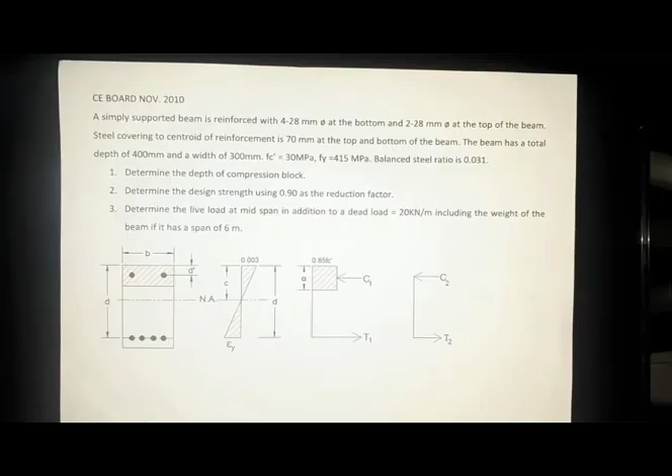Yung problem natin ay binigay noong November 2010 sa CE board exam. A simply supported beam is reinforced with 4-28mm bars at the bottom and 2-28mm bars at the top of the beam.

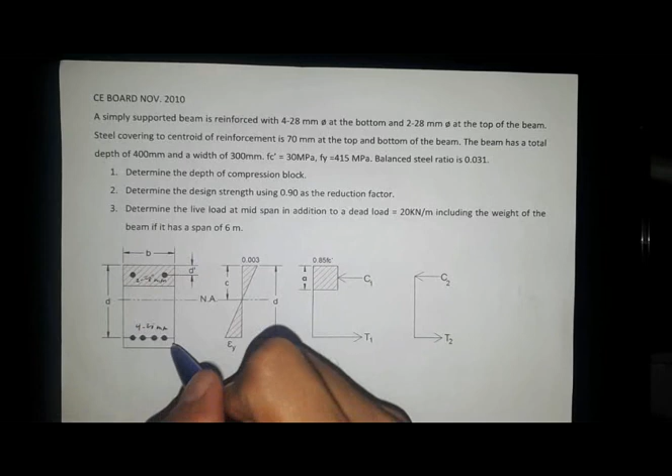Steel covering to centroid of reinforcement is 70mm at the top and the bottom of the beam. So 4-28mm yung bottom, while yung top natin ay 2-28mm. Steel covering to the centroid of reinforcement sa bottom is 70mm, while sa top, yung D prime ay 70mm.

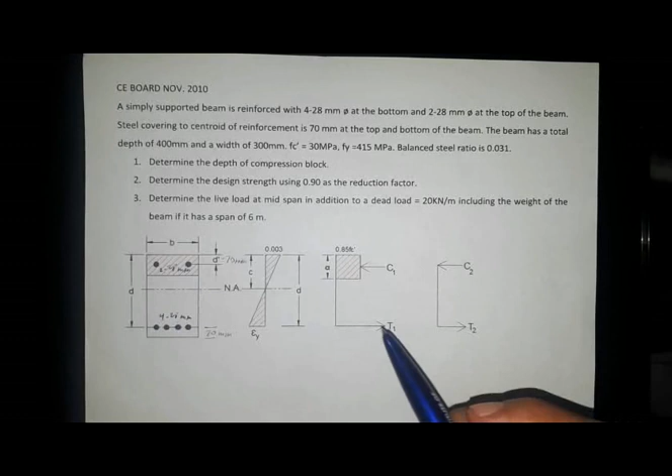The beam has a total depth of 400mm. So yung H or total depth ay 400. Kung i-subtract natin ang 70, ang effective depth natin ay 330mm. At ang width ay 300mm, so ito yung width natin, 300mm.

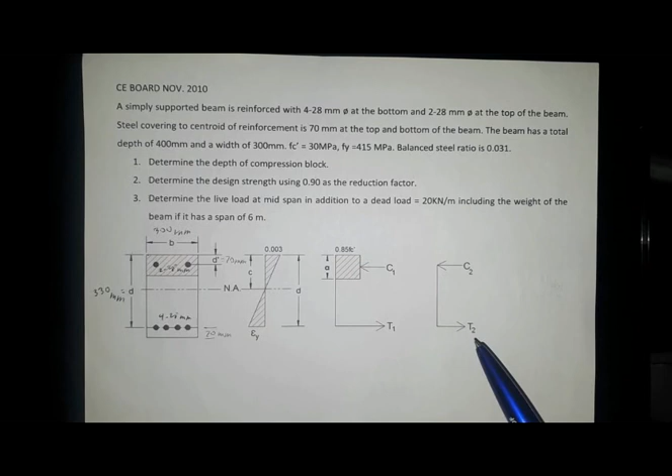FC prime equals 30 MPa, Fy is 415 MPa. Balance steel ratio is 0.031. I-verify natin ito kung ito pa ba, dahil ito ay binigay noong November 2010, malamang ginamit dito ay NSCP 2001 version. May nabago na sa 2015, kaya i-verify natin kung yan pa din yung lalabas.

Number 1, determine the depth of compression block. So we refer to the value of A.

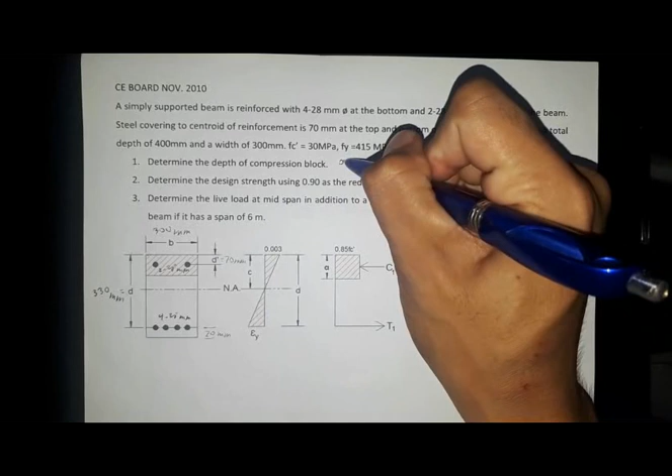Number 2, determine the design strength using 0.90 as the reduction factor, so MU. I-verify din natin kung 0.9 pa ba yung dapat gamitin, baka kasi hindi na yan based dun sa provisions ng code.

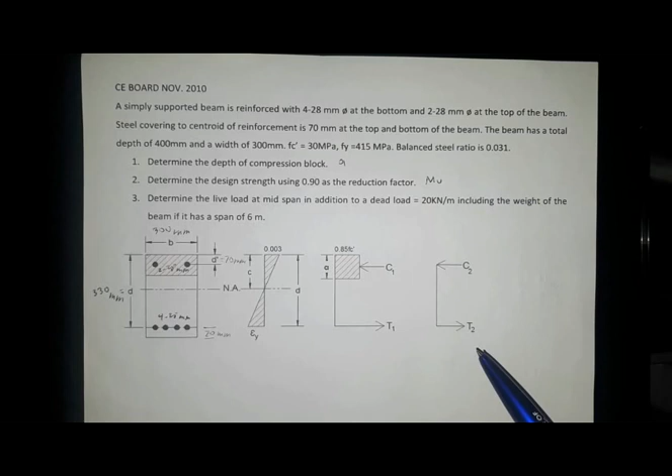Number 3, determine the live load at mid-span in addition to a dead load of 20 kN per meter, including the weight of the beam if it has a span of 6 meters. So sa number 3, we are looking for the value of the concentrated live load LL for the beam.

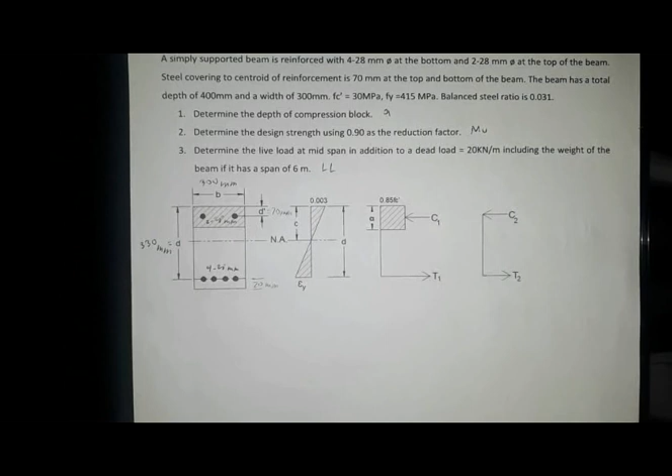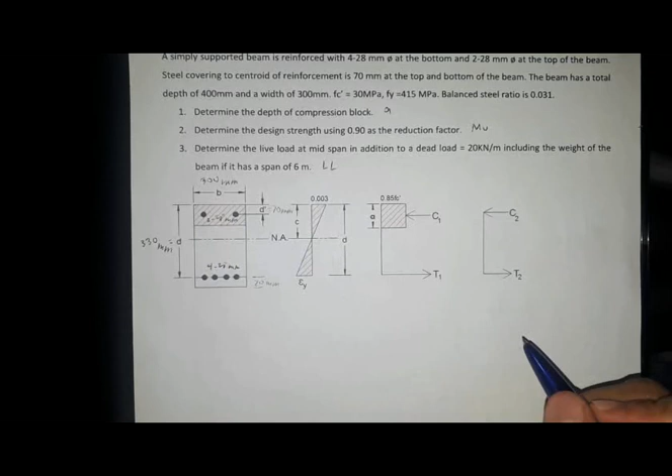Simulan natin for checking kung kailangan ba talaga ng compression bars o hindi na. In order to say na needed yung compression bars, we must satisfy the condition rho is greater than rho max. Yung rho natin ay equal to AS over BD. Yung AS natin ay yung total area of steel sa tension side.

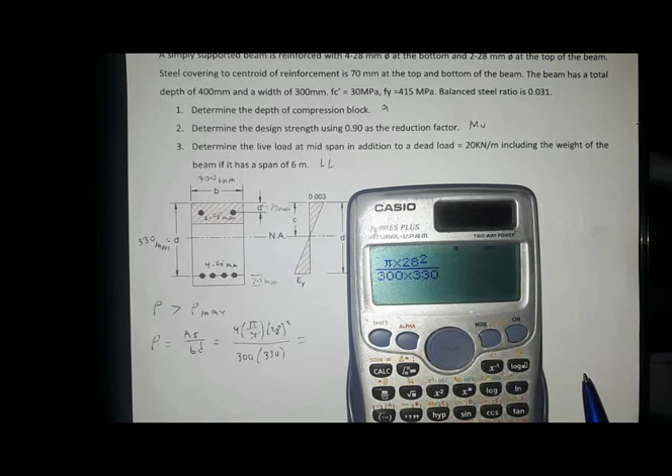So we have 4 times the area, pi over 4 times the diameter of 28 squared, over B is 300 times D of 330. Pwede natin i-cancel yung 4. So yung value ng rho natin ay pi times 28 squared, kasi kinansel natin yung 4, over 300 times 330. Yung rho natin is 0.0249.

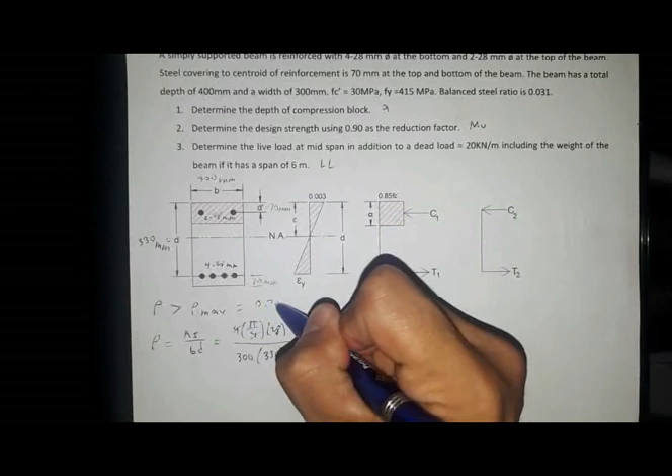Ngayon, kunin na natin yung rho max. Rho maximum ay 75% ng rho balance. Ngayon, let's solve for the rho balance.

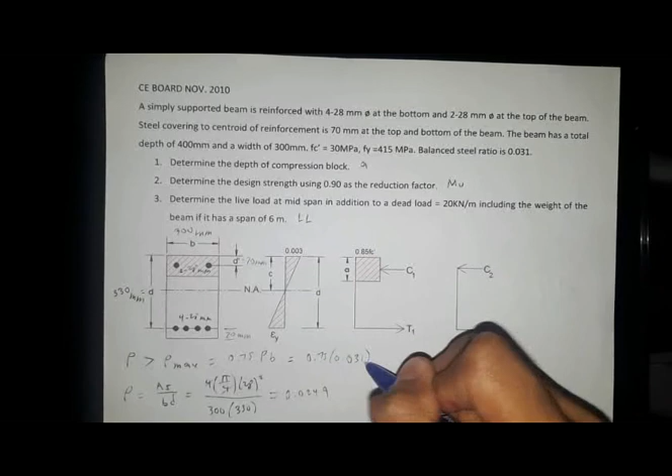Dito, balance steel ratio is 0.031. Kung yan yung gagamitin natin, it will be 0.75 times 0.031, and that is equal to 0.75 times 0.031, so that is 0.02325.

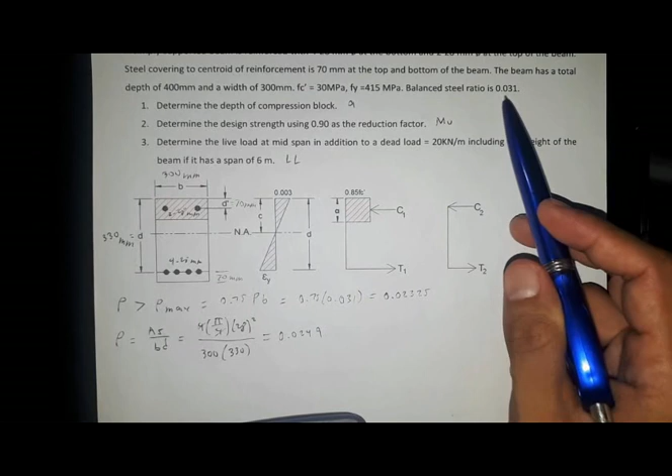Kung titignan natin, mas mababa ito sa value ng rho. Kung gagamitin natin ito, masasabi natin na needed talaga yung compression bar. Pero, since we have a new code or new version ng NSCP which is 2015, i-check natin kung ito ba talaga yung tamang rho balance.

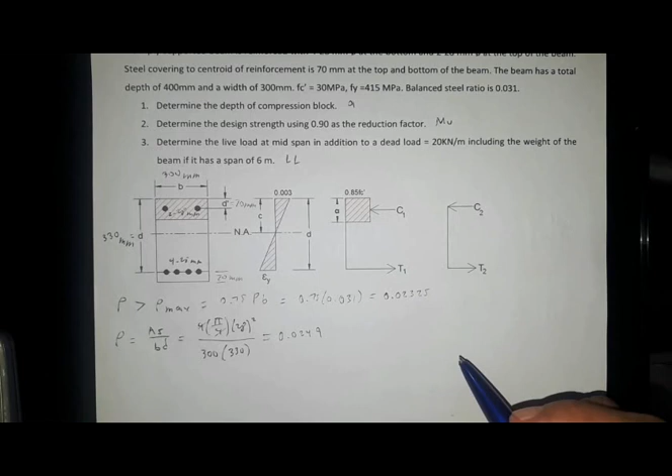Kasi may formula naman tayo sa rho balance. Rho balance is equal to 0.85 FC prime beta times 600 over Fy times 600 plus Fy. Yun yung formula natin for the rho balance.

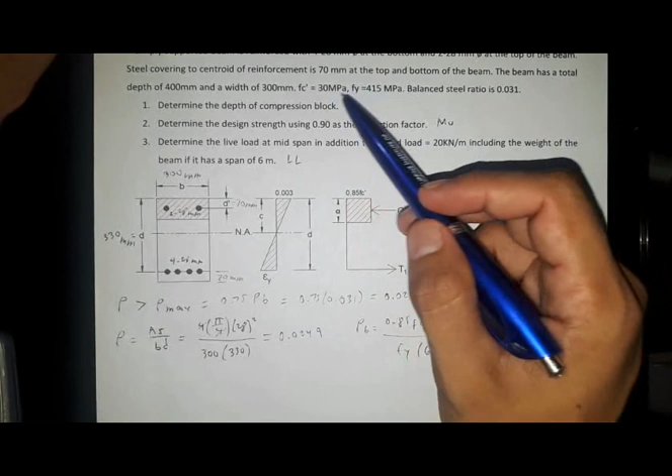Ngayon, since meron tayong formula, let's just do some substitution. Ano ba yung beta factor natin? Since we have FC prime of 30 MPa, sa old code, kapag 30 MPa and below, automatic 0.85 yung beta factor.

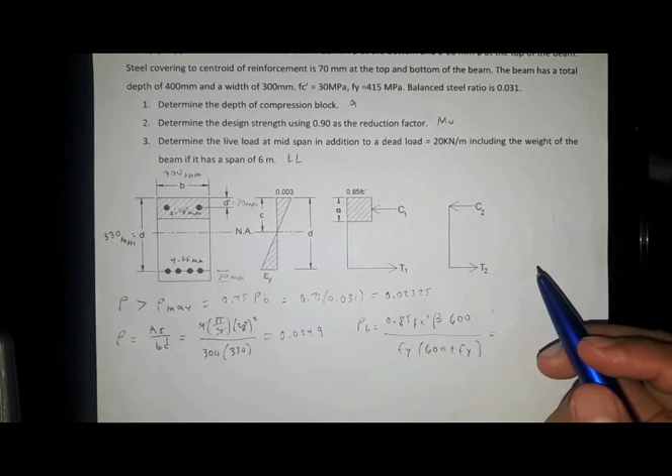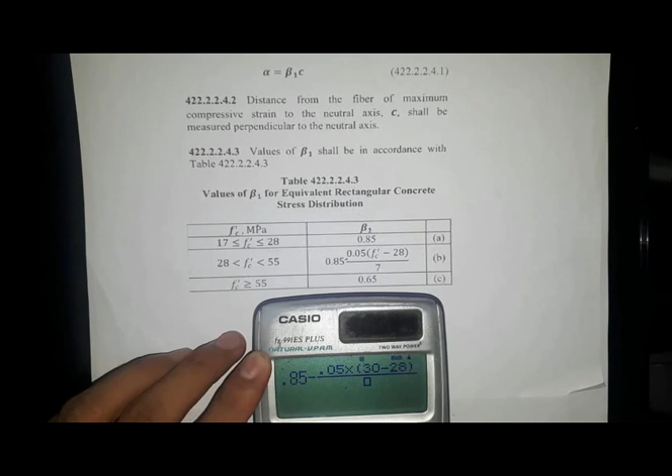Pero since bago yung code natin, yung beta factor natin ay ito, ayun ang sabi sa code natin. Yung beta factor natin ay 0.85 minus 0.05 times the quantity ng F prime C natin na 30 minus 28 over 7. So we have a beta factor of 0.836, hindi na 0.85.

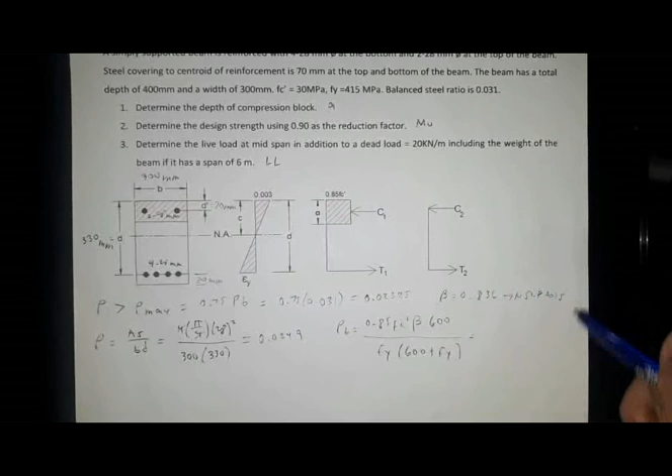Kaya magbabago yung rho balance natin. Yung beta factor natin equals 0.836 as per NSCP 2015, yun yung mababago.

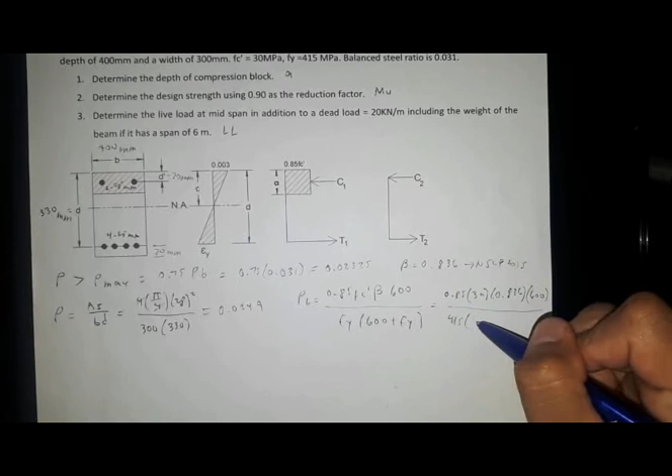Therefore, we have rho balance of 0.85 multiplied by 30 times 0.836 times 600 over Fy natin na 415 times 600 plus Fy. So yung rho balance is equal to 0.85 times 30 times 0.836 times 600 over 415 times 600 plus 415. We have 0.0304.

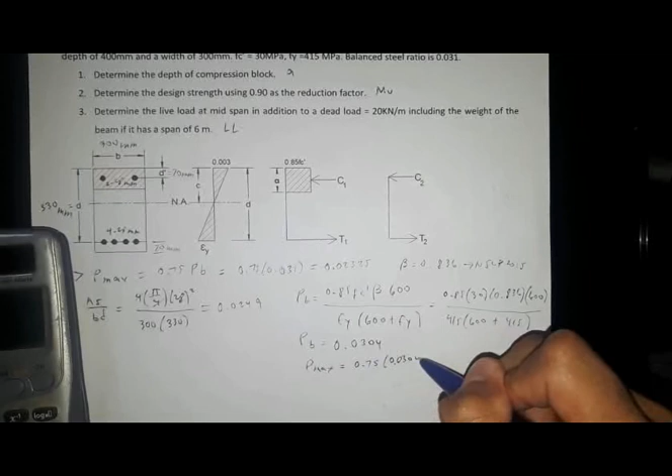0.0304, so yung rho max is equal to 0.75 times rho balance. So multiply natin, times 0.75. So that is 0.0228. So bumaba pa yung value natin ng rho max. So pasok pa rin, so yung rho natin is greater than rho max.

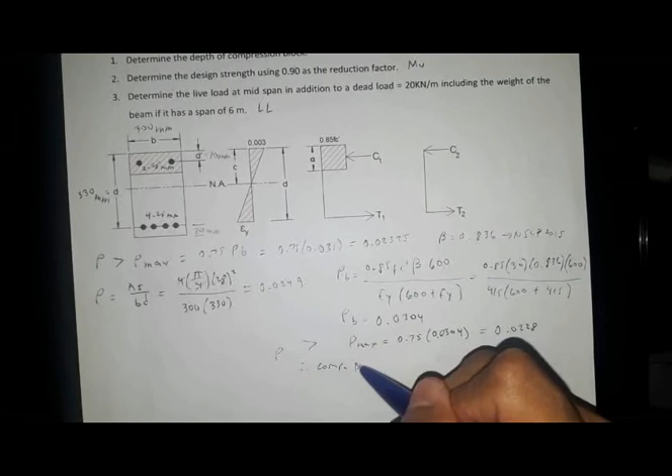Therefore, need natin yung compression bars. So therefore, compression bars needed.

Now, let's check naman if tension or compression steel will yield. So we have to satisfy this equation: rho minus rho prime should be less than 0.85 multiplied by Fc prime, beta, times 600, times D prime, over Fy times D times 600 minus Fy.

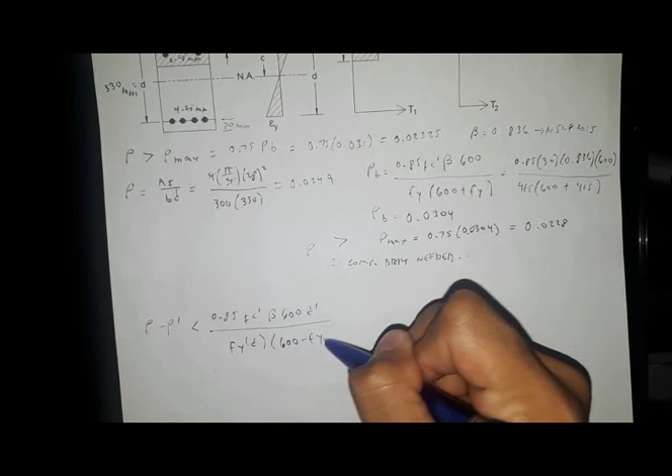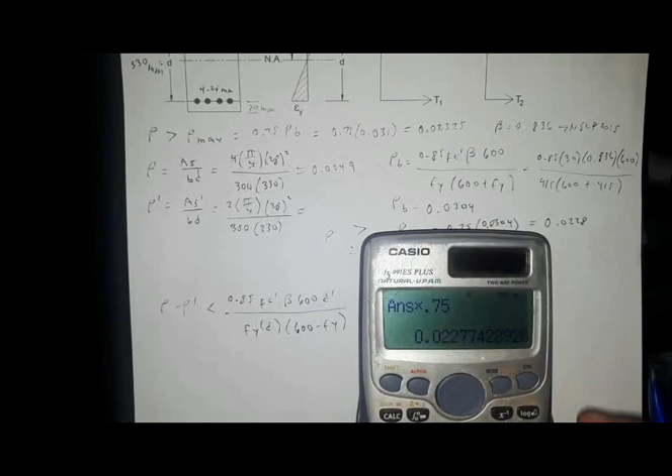So kunin muna natin yung rho prime. Yung rho prime equals AS prime over BD. So we have 2 times pi over 4 times 28 squared over 300 times 330. So yung rho prime natin, that will be 2 times pi over 4 times 28 squared over 300 times 330, and that is 0.0124.

0.0124. So yung difference, rho minus rho prime, is equal to yung kaninang nakuha natin, 0.0249 minus yung answer natin kanina na 0.0124. So that is 0.0125.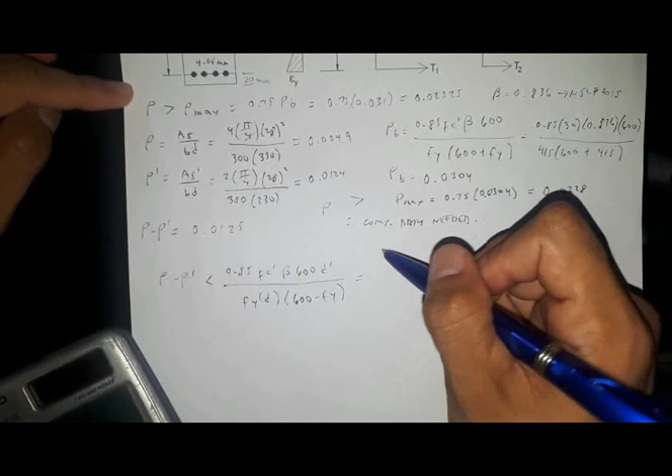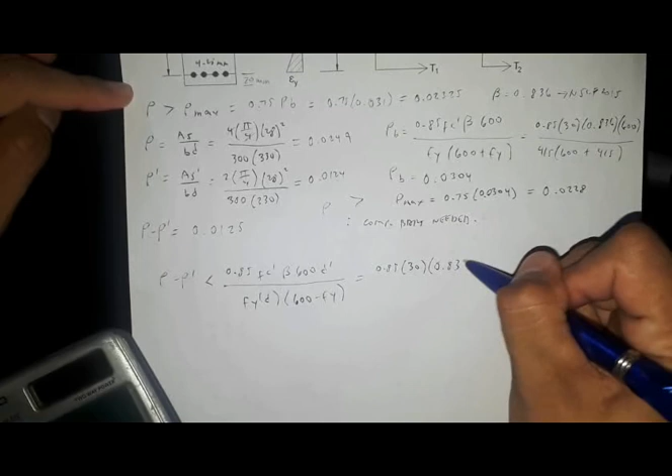So dapat ito maging less than dito. So by substitution, we have 0.85 times 30 times the beta factor na na-solve natin, 0.836 as per NSCP, times 600 times D prime of 70, over Fy times D times 600 minus Fy.

So dito natin ilagay: 0.85 times 30 times 0.836 times 600 times 70 over 415 times 70 times 600 minus 415, and that will be equal to 0.167.

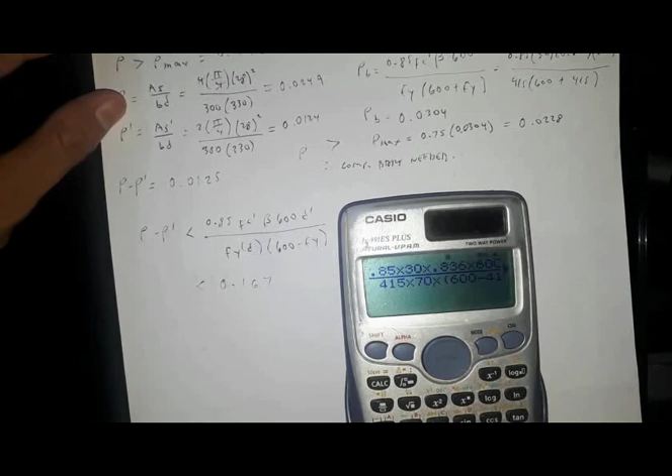So ulitin natin na. That is 0.85 times 30 times 0.836 times 600 times 70 over 415. So this is not 70 but this is 330 pala, so mabuti yung check. So that is 330, so that is equal to 0.0353.

0.0125 is less than 0.0353. Therefore, compression steel does not yield. So next, since compression steel does not yield,

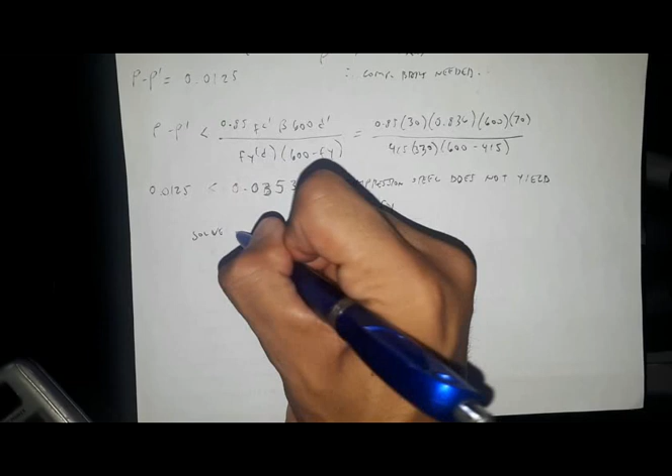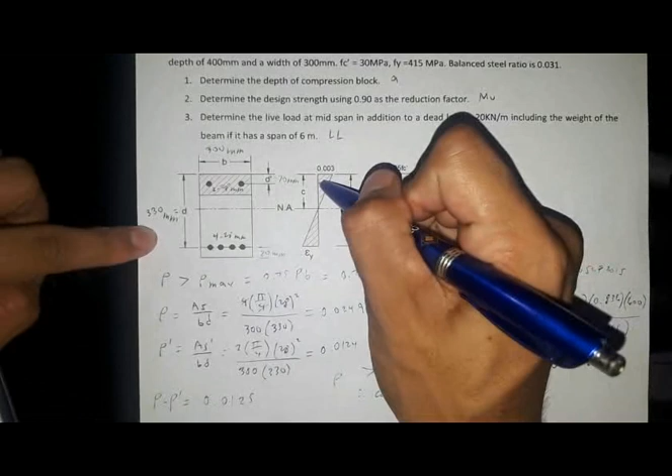Therefore Fs prime is not equal to Fy. So now we solve for Fs prime. So galing dito, this will be your strain of the steel, epsilon S prime. By ratio and proportion, this is C, this is C minus 70.

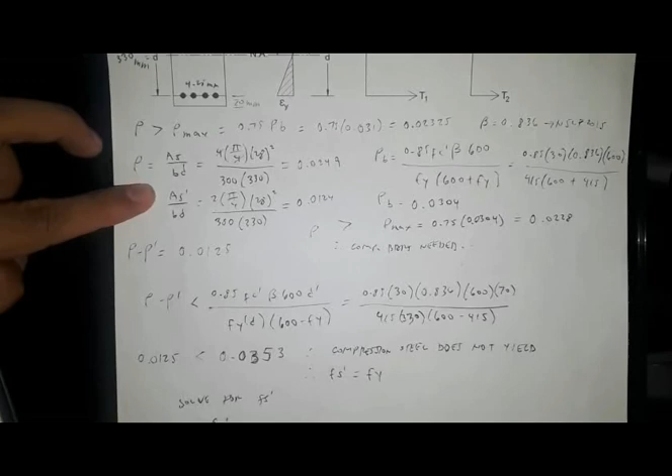So we have epsilon S prime is to C minus 70 equals 0.003 is to C. So masolve natin, the strain of the compression steel is equal to 0.003 times C minus 70 over C.

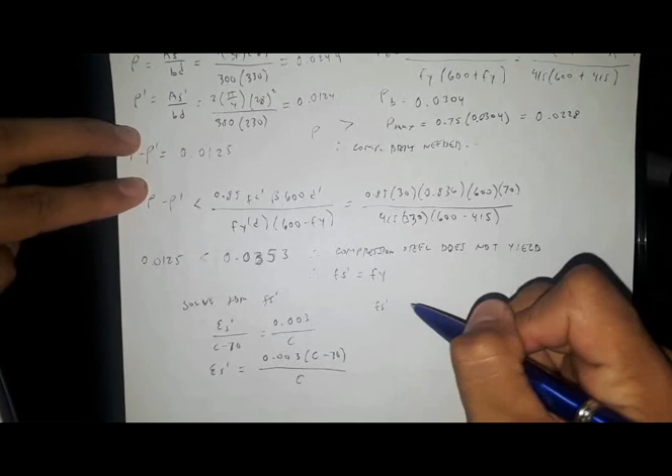And then we also have Fs prime, so by Hooke's law, is equal to the strain of the compression steel times the modulus of elasticity. So therefore this one will be Fs prime equals 200,000 times 0.003 times C minus 70 over C, and that will become 600 times C minus 70 over C.

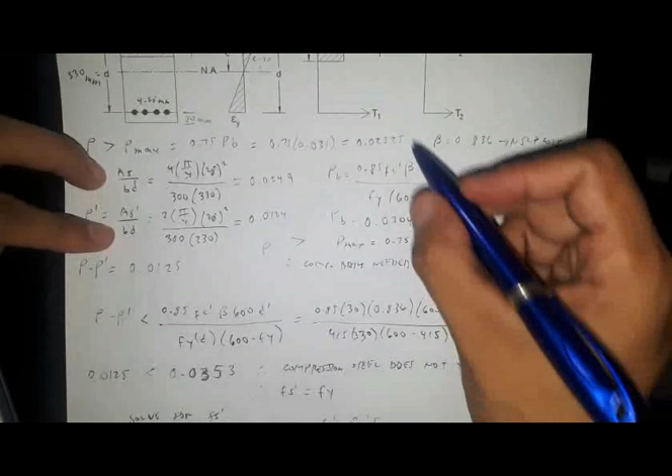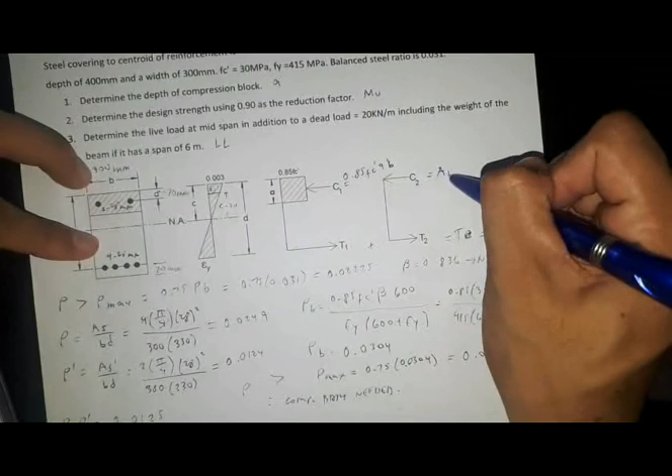So now, since this is a couple, we have T1 and T2, so T1 plus T2 equals C or T. So if we equate summation of forces, T equals C1 plus C2. Here T equals AS Fy, while your C1 is 0.85 Fc prime AB, and your C2 is AS prime Fs prime, since Fs prime is not equal to Fy dahil hindi nag-yield yung steel.

So ASFY, pag sinubstitute natin, will be equal to 0.85 Fc prime, yung A natin, then B plus AS prime Fs prime.

Now, by substitution: pi over 4 times 4 times 28 squared times Fy of 415 MPa is equal to 0.85 times 30 times A times 300, plus AS prime is pi over 4 times 28 squared times 2, multiplied. So yung Fs prime natin, 600 times C minus 70 over C.

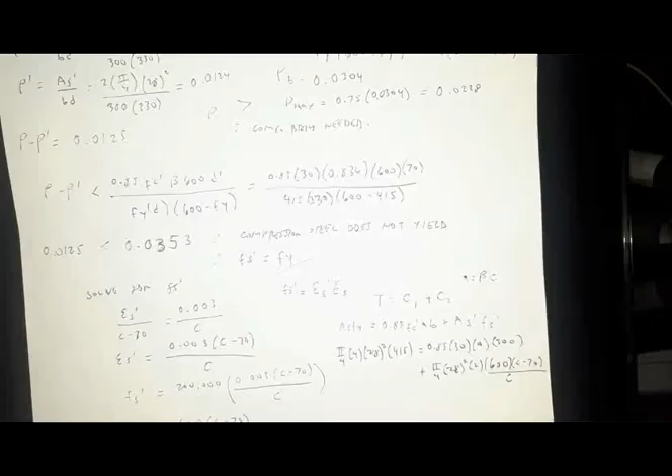So yung A natin, pwede nating i-substitute as A is equal to beta C. Since yung beta factor natin is 0.836, sa value of A magiging beta 1 C, that is 0.836 times C. So C na lang, yung C na lang yung R natin, yung variable.

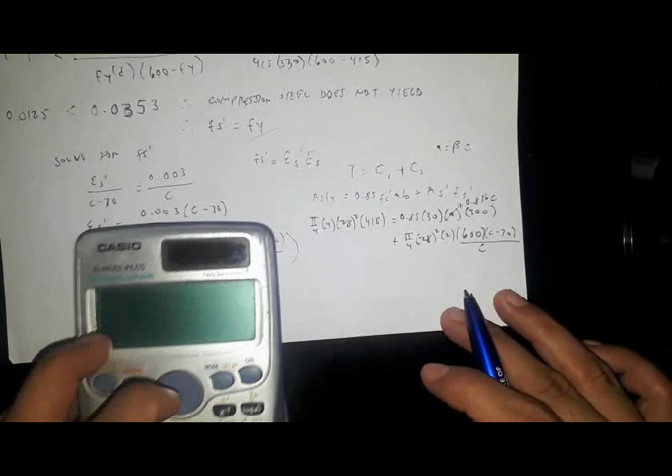So pwede na tayo mag-input sa calculator using shift solve. So ito, cancel. So that is pi times 28 squared times Fy of 415 equals

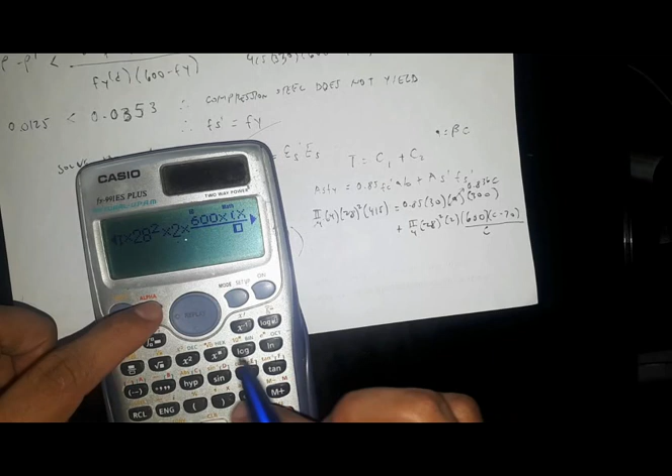0.85 times Fc prime times beta, so that is 0.836 times yung C, let's use X, times 300 plus pi over 4 times 28 squared times 2 times 600 times X minus 70, so yan yung value natin ng C over X. So check ulit natin: pi times 28 squared times 415 equals 0.85 times 30 times 0.836 times 300 plus 0.25 pi times 28 squared times 2 times 600 times X minus 70 over X. Shift solve.

So let's wait. Yung value ng C natin is equal to 114.76. So yung A is equal to beta 0.836 times C. So therefore, yung A natin, or the depth of compression block, is equal to 95.94 mm.

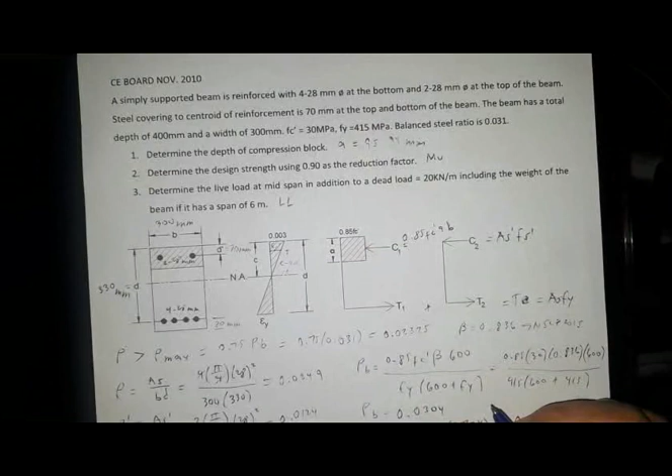So nasagutan na natin yung question number 1. So A is 95.94 mm. So now, let's go to question number 2.

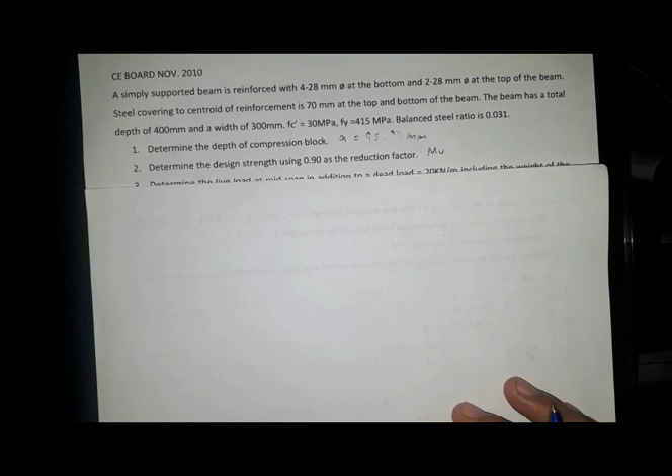So, determine the design strength using 0.9 as the reduction factor. So MU. Check muna natin kung 0.9 yung gagamitin natin as reduction factor. So tignan natin dito sa 2015 code.

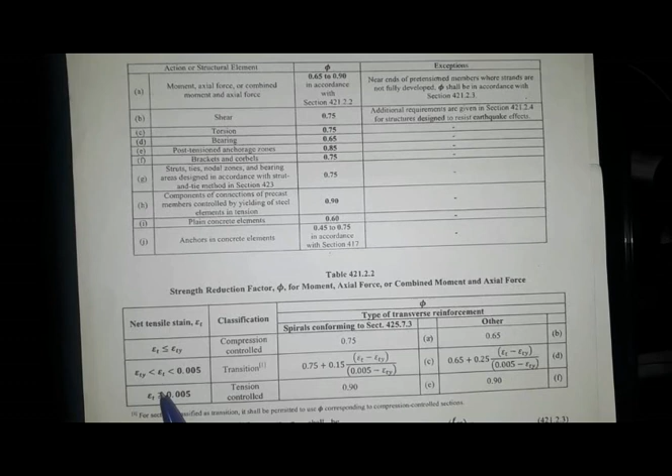Yan. So when the strain of the steel is greater than 0.005, so that's the time na nagagamit tayo ng 0.9.

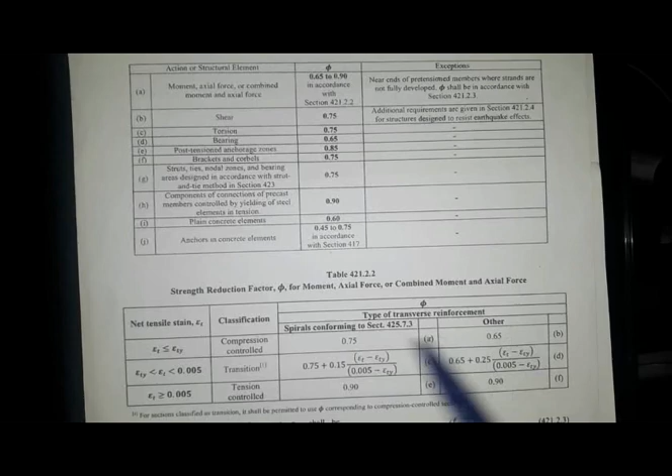So we have this and this one. Kung nasa in between siya, ng 0.002 or yung maximum yield strain for compression and between dito ng 0.005, itong gagamitin natin. Kung mas mababa pa siya 0.002 or yung maximum compression strain, so ito yung gagamitin natin. So i-check natin yung value ng strength reduction factor phi, kung yun ba talaga ay 0.9.

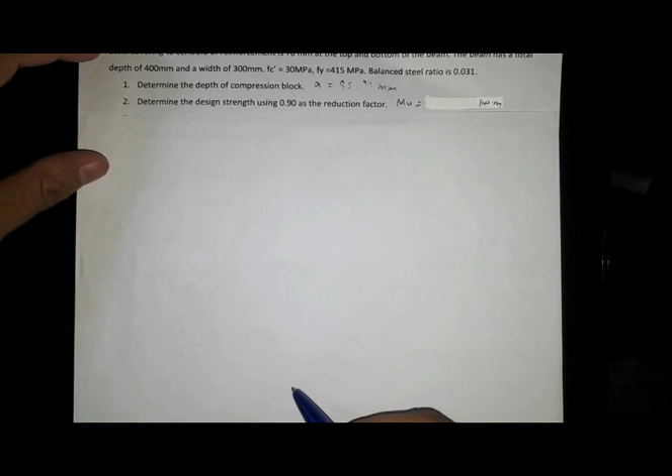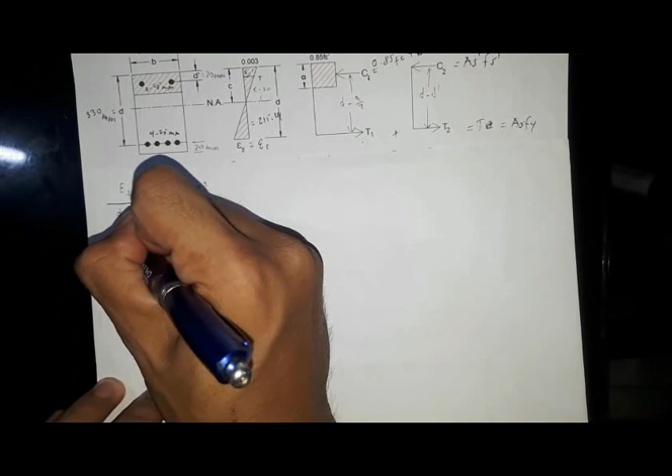So galing dito sa stress strain diagram, by ratio and proportion, yung yield strain natin ng steel is to D minus C equals the maximum strain for compression block of 0.003 is to C. So, by substitution, the yield strain of steel is 0.003 multiplied by D minus C.

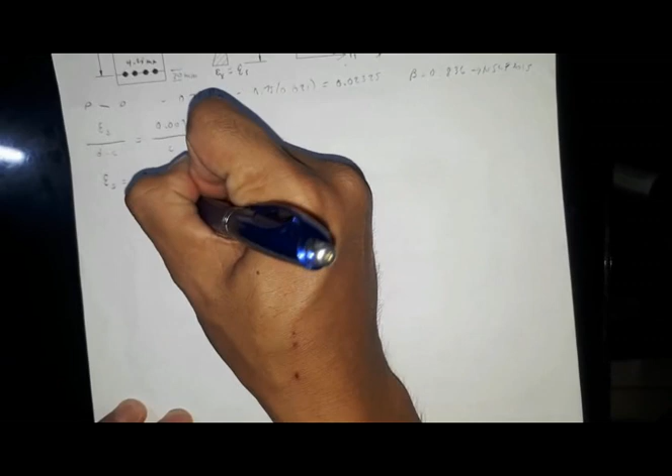So, that is 330 minus, yung C natin is 114.76. So, minus 114.76 over C. So, sa calculator natin, yung value ng yield strain of the tension steel is 0.003 times quantity of 330, so that is D minus C, over C. So that will be 0.0056.

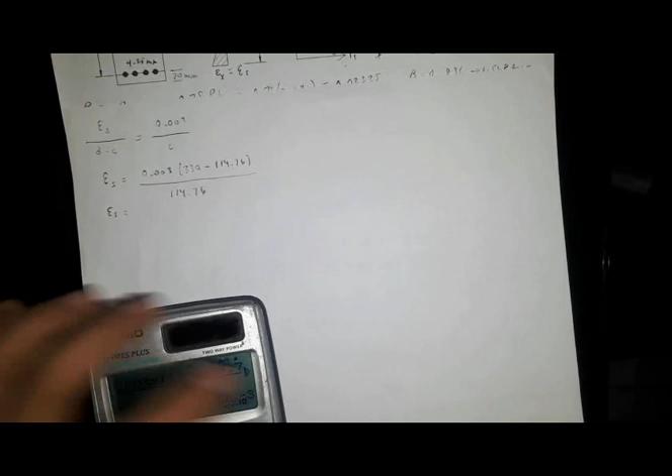And this value is greater than 0.005. Therefore, we use phi equals 0.9.

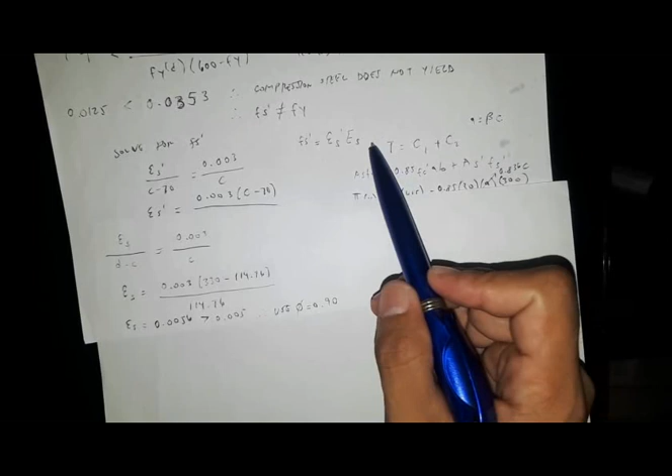So now, since kanina, compression steel does not yield, ito yung Fs prime is equal to the strain of steel multiplied by the modulus of elasticity of the steel. So, ito yung formula niya kanina. Solve natin yung Fs prime.

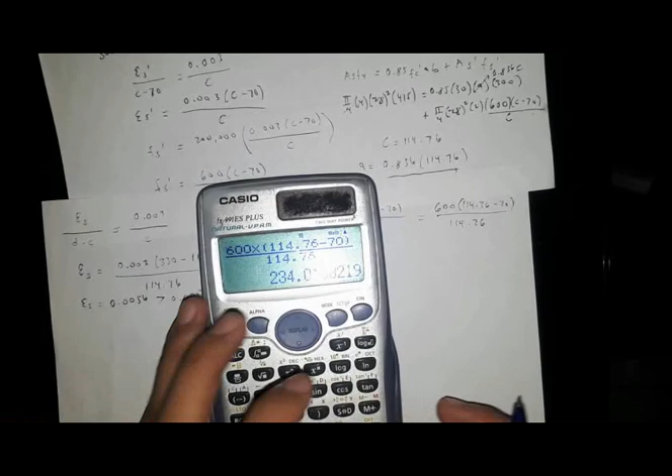We have Fs prime equals 600 times C minus 70 over C, and that is 600 times 114.76 minus 70 over 114.76. So Fs prime is equal to 600 times the quantity of 114.76 minus 70 over 114.76. So we have 234.02 megapascals. So that is way less than 415 MPa.

Meaning to say, hindi nga mag-yield yung compression steel dahil hindi niya ma-reach yung maximum stress na kaya ng steel natin sa compression bars. Now we have the value of the Fs prime.

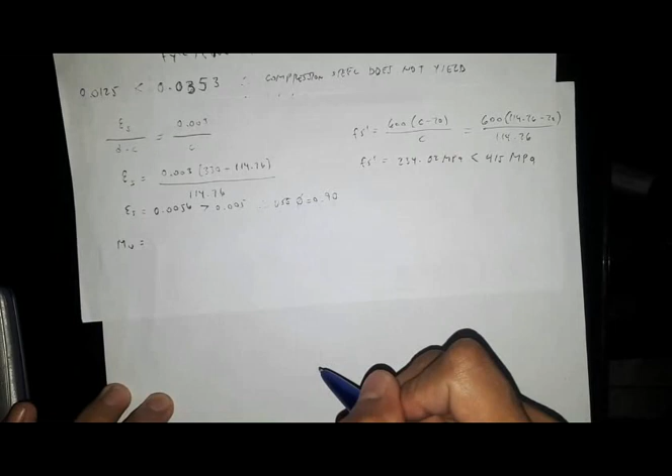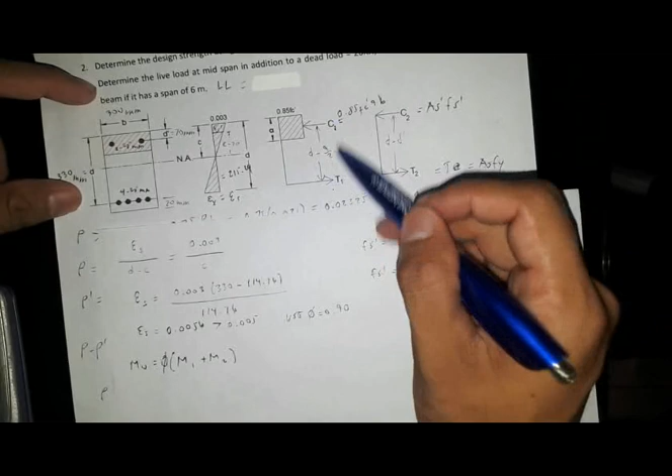So pwede na tayo mag-solve ng ultimate moment. Mu is M1 plus M2 multiplied by phi. So yung M1 natin could either be C1 times the moment arm plus C2 times the moment arm, or T1 multiplied by the moment arm plus T2 by moment arm. So, eto na lang yung gamitin natin, C1 and C2.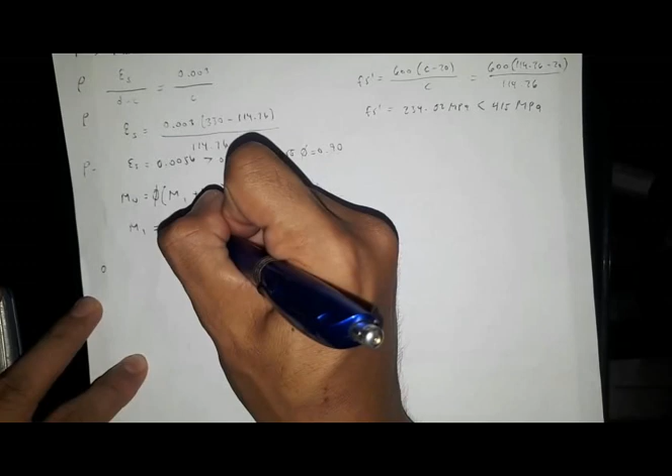So, M1 is equal to C1 multiplied by the moment arm of D minus A over 2. And that is 0.85 Fc prime AB times D minus A over 2. So, by substitution, 0.85 multiplied by 30 times yung A natin kaninang nakuha is 95.94 times B of 300 times D is 330 minus A over 2.

Tapos divide natin sa 1,000 squared para maging kilonewton meter. So M1 equals, so we have 0.85 times 30 times 95.94 times 300 times the quantity of 330 minus 95.94 over 2 times 1 over 1,000 squared, and that is equal to 206.99 kilonewton meter.

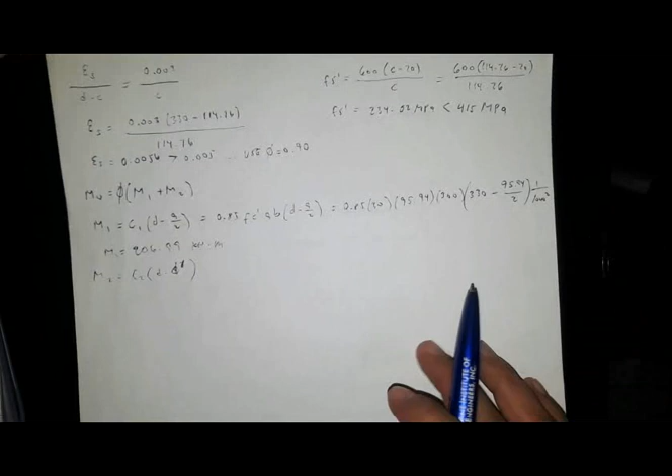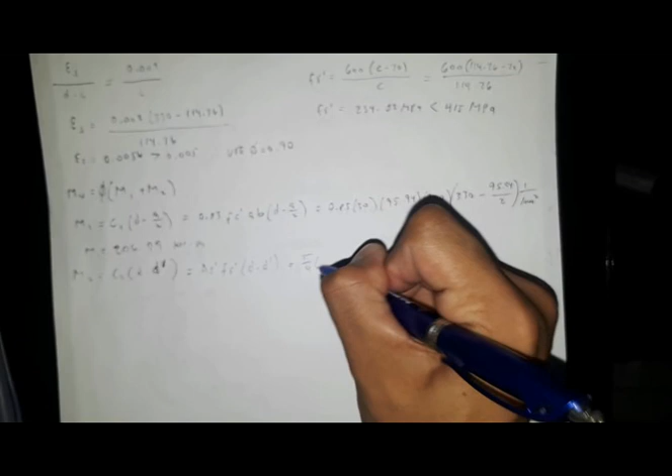Now for M2 is equal to C2 times D minus D prime. So yung C2 natin is AS prime, FS prime. So that is AS prime, FS prime times D minus D prime, and that will be equal to pi over 4 times the diameter of 28 squared multiplied by the number of bars 2, multiplied by Fs prime, yung kanina 234.02 MPa, times D minus D prime multiplied sa 1 over 1,000 squared para kilonewton meter yung unit natin.

So M2 is, so that will be pi over 4 times 28 squared times 2 times 234.02 times quantity of 330 minus 70 divided by 1,000 squared, and that is 74.93 kilonewton meter.

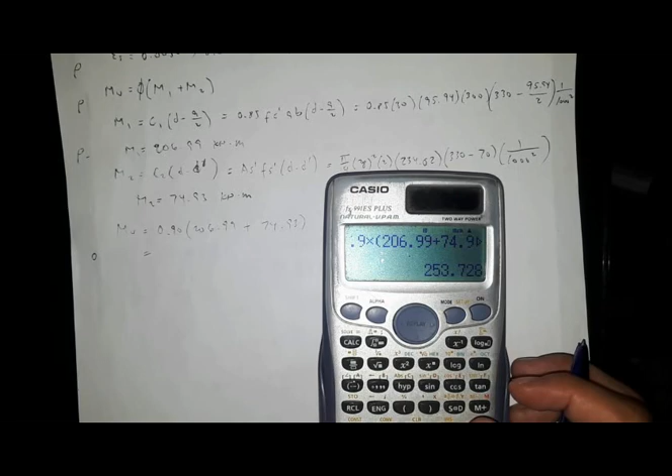So now meron na tayong M1 and M2. So the ultimate moment MU is phi, so that is 0.9 times M1 plus M2. So your ultimate moment is equal to 0.9 times the quantity of 206.99 plus 74.93, and that is 253.73 kilonewton meter.

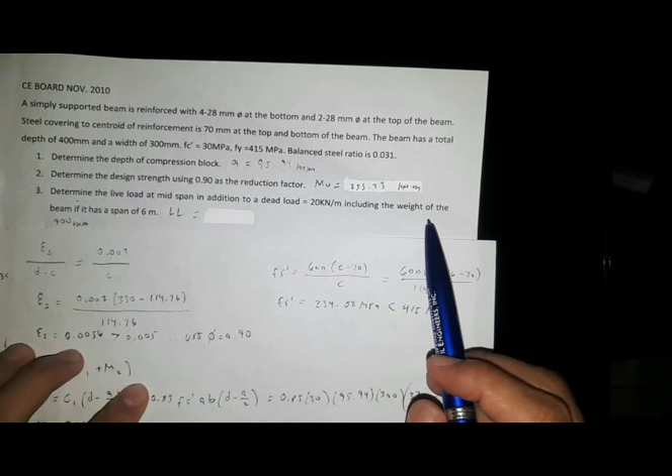So ito yung MU natin. So we have 253.73 kilonewton meter. Now, number 3 na tayo. So determine the live load at midspan in addition to a dead load of 20 kilonewton per meter, including the weight of the beam if it has a span of 6 meters.

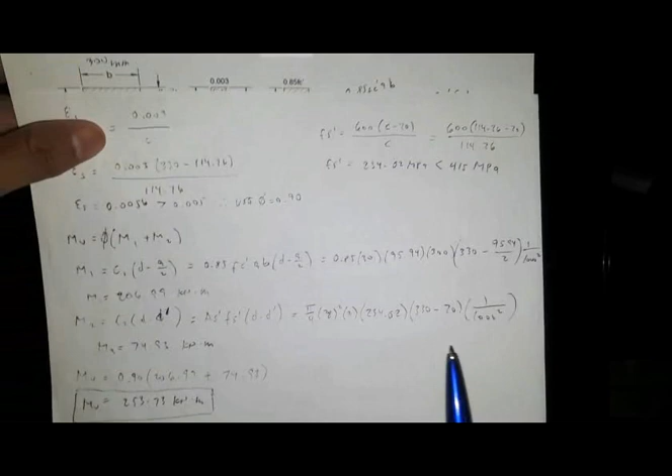So yung live load natin is concentrated at midspan. Therefore, we use the formula for the maximum moment for a concentrated live load at midspan. So for number 3, sa dead load natin, maximum moment natin is equal to WL squared over 8, where W is your dead load. While sa live load, since it is concentrated, yung maximum moment natin is equal to PL over 4.

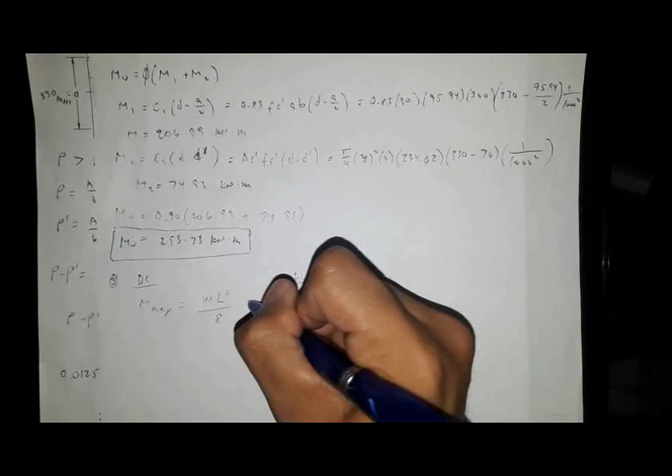And since ultimate moment, so multiply natin siya by, sa live load, this is 1.6. Sa dead load, we multiply it by 1.2 as per NSCP 2015 specs. Therefore, yung MU natin, 253. So, MU equals the dead load times L squared over 8 times 1.2, plus the live load of PL over 4. So, UP natin yung live load times 1.6.

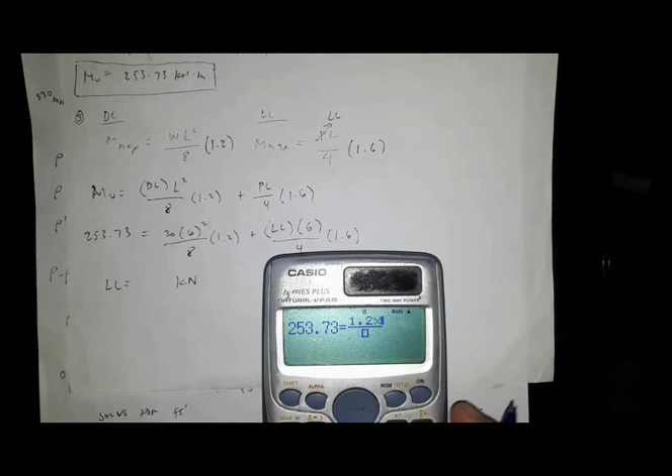So now, let's substitute 253.73 equals yung dead load natin 20 times the span of 6 squared over 8 times 1.2, plus the concentrated live load, so yung P or LL multiplied by 6 over 4 times 1.6. So live load natin is equal to, so that is in kilonewton. So shift solve na lang tayo para mabilis. 253.73 equals 1.2 times 20 times 6 squared over 8.

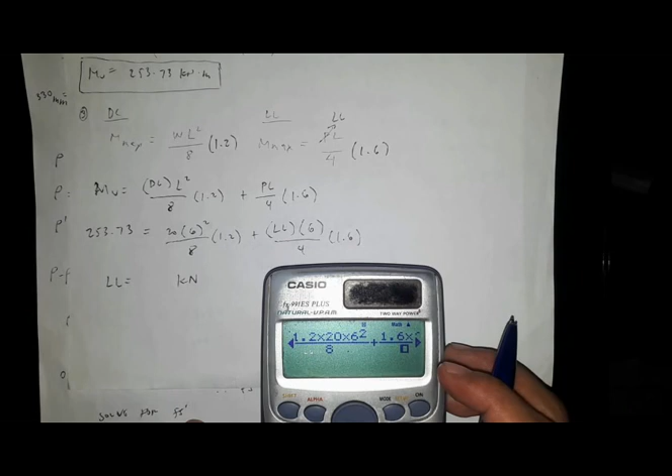Plus 1.6 times 6 times yung natin, yung concentrated live load, then over 4. So shift solve. So yung concentrated live load natin is 60.72 kilonewton.

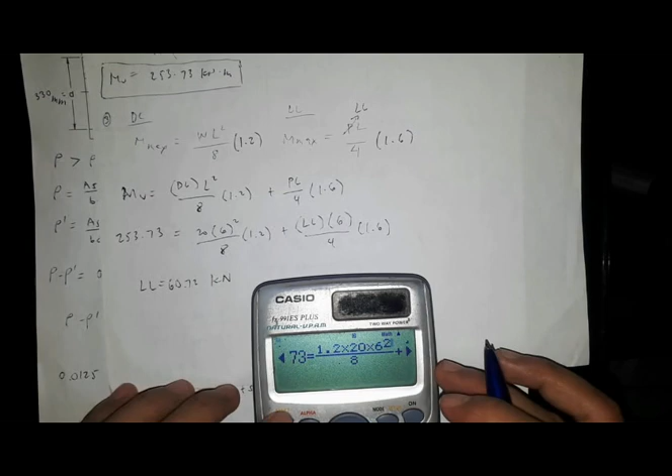So double check natin. So 1.6 times PL over 4, ito, 1.2 times WL squared over 8, 253.73. Okay, so yun yung sagot. Yung concentrated live load at midspan is 60.72 kilonewton. So nasagutan natin yung sample problem.